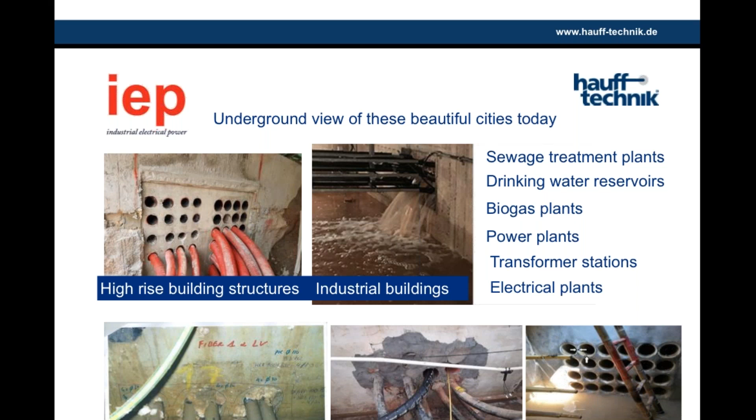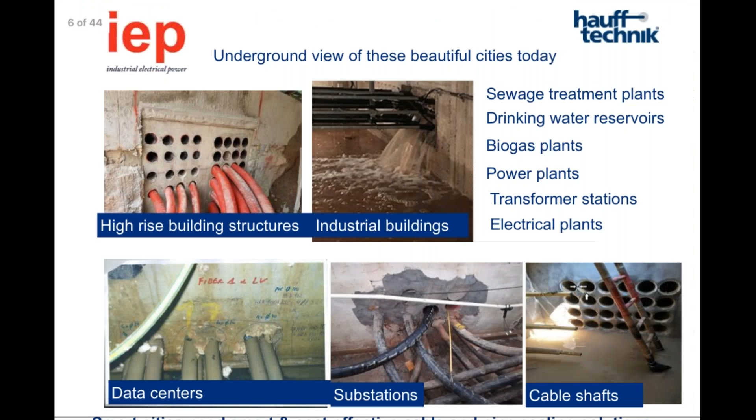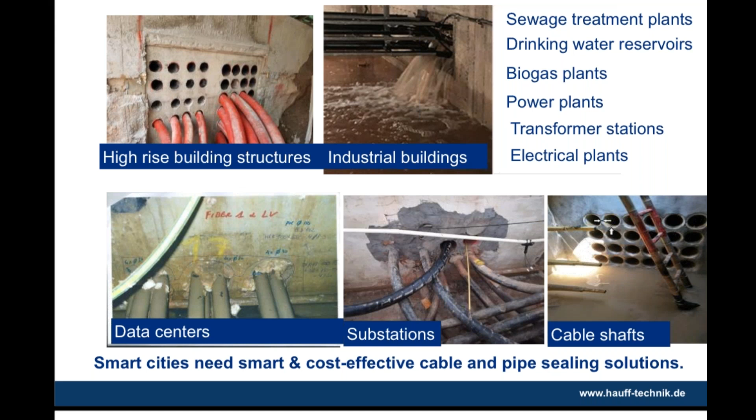A lot of architects, even today, make it a bit easy by planning or integrating a PVC pipe into a wall, or leaving a rectangular opening in a wall, or asking a wall to be core-holed so that later an installer can bring his pipes or cables through the wall and try to seal it off in the best way he can. Unfortunately, you will all experience that in the past, this kind of sealing method always results in a lot of water ingress and a high cost of maintenance. Having a proper and effective sealing system in place in any residential, commercial, industrial, or treatment plant and facility plays an important role in today's development.

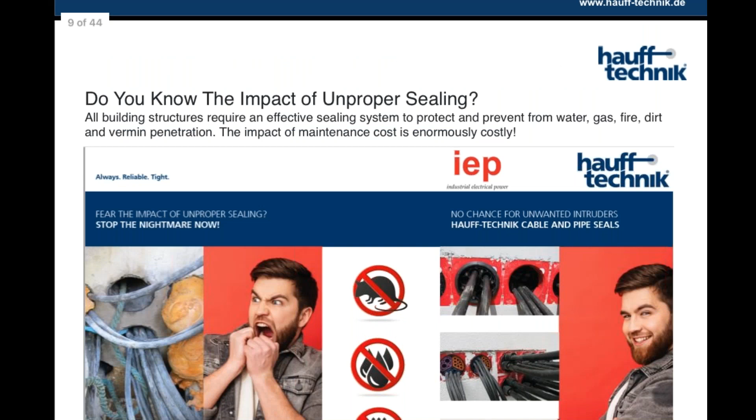Do you know the impact of improper sealing? Meaning, if you put in a simple PVC pipe, which might seem a very low-cost starting point, at the end it becomes a very expensive one. All building structures require an effective sealing system to protect and prevent water, gas, fire, dirt, and vermin penetration. And the impact on maintenance cost is enormous.

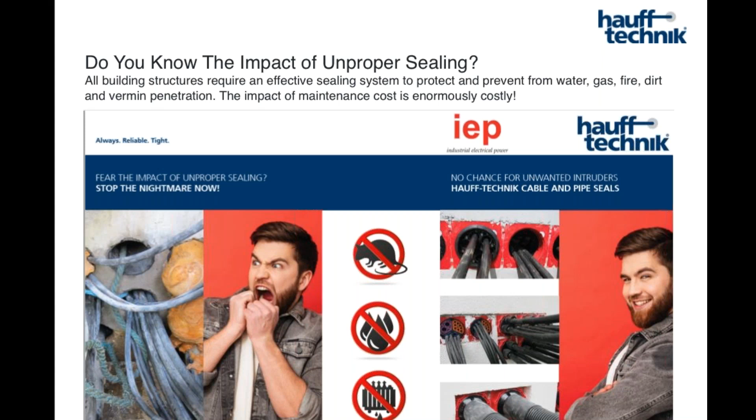Through my job, I had the ability to talk with a lot of maintenance managers or CEOs of utility companies, and I always asked them: what is the budget that you spend on maintenance to get water and vermin out of your buildings? They all look down and start to cry very hard, because these maintenance costs run into the billions and billions of ringgit every year.

If you would focus on digital innovation to drive change and prepare for new opportunities in the post-pandemic building and construction world, you might end up with Hauff Technik as your partner for entry systems and sealing systems. By the way, did you know that Hauff Technik in Germany has been amongst the top innovators for more than 10 years among small and medium-sized companies? We are in the top 100 during 10 years in a row, and we are also, of course, a top employer for our employees.

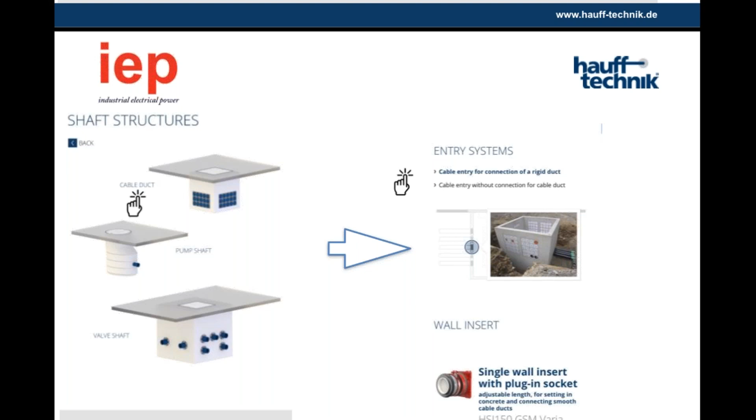Let's say you want to start up as an engineer or designer to build a shaft structure where your cable ducts or cables run in and you want to seal them permanently. In this case, you go to shaft structure, click on cable duct, and you end up with a nice picture, which I'll enlarge for you.

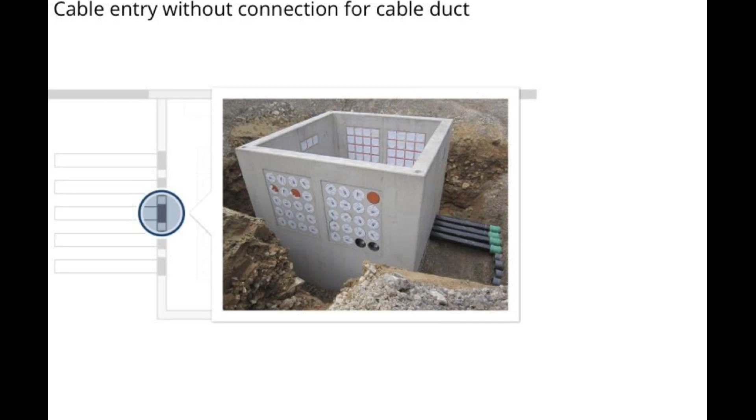In this picture, you can see our solutions and the connection of the cable ducts already. If you scroll down on the website, you will find our product for this solution, which is a single wall insert with a plug-in socket, in this case for a pipe OD of 160 millimeters. Not only will you get information on the product, but also installation instructions, test reports, data sheets, and tender specifications — meaning even the specification for your tender is already prescribed on our website.

Most of what we call PPVC, prefabricated pre-finished volumetric construction, used in Malaysia and Singapore, is manufactured in Johor Bahru. Johor Bahru is a Malay state near the border of Singapore, where a lot of precasters are situated.

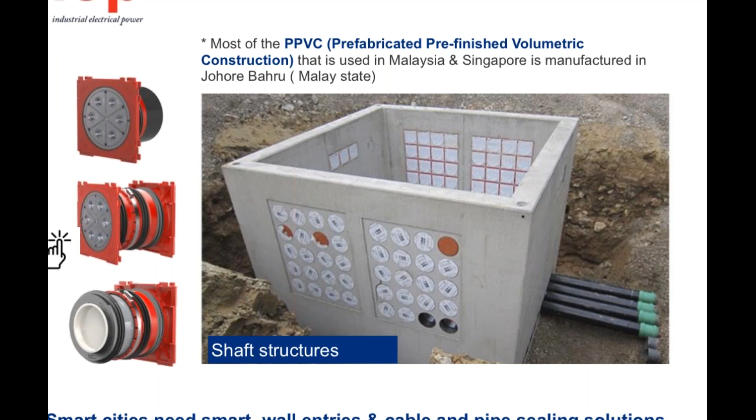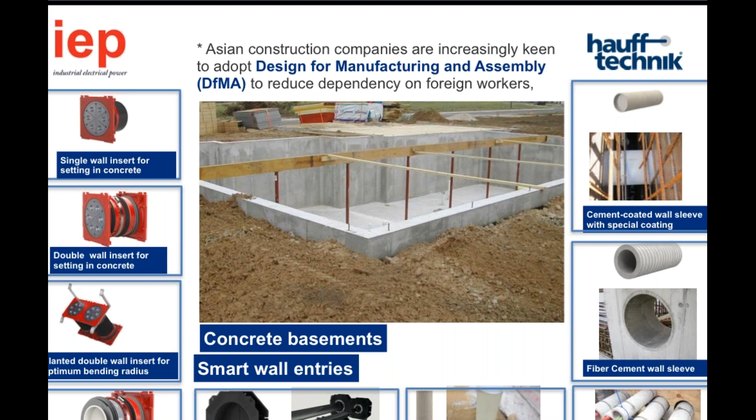Asian construction companies are increasingly keen to adopt what they call DFMA, design for manufacturing and assembly, to reduce dependency on foreign workers, reduce fault risks, and reduce high costs. If you are building a basement in concrete, whether prefabricated or built on-site, for these applications we have a number of entry systems ready for you.

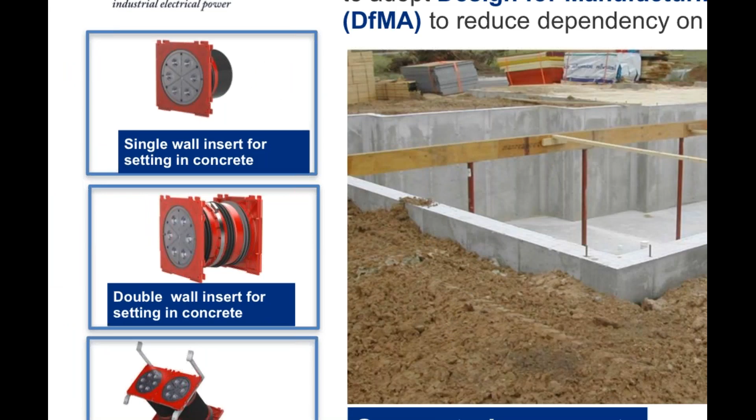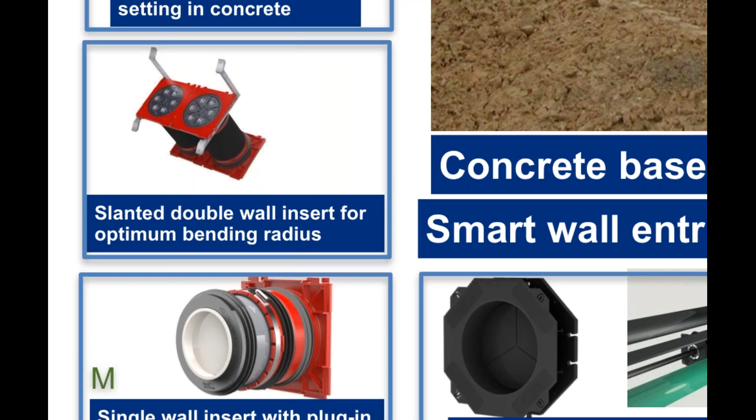If you need an entry system for small walls from 70 up to 120, or from 100 up to even 1 meter, or you need a solution where you put in an entry system under a certain angle for an optimum bending radius, or as we saw earlier, you want to connect a cable duct to your entry system, or you have an entry system needed for a pipe up to 200 millimeters, which is processed for PMBC, meaning polymer modified bituminous coatings.

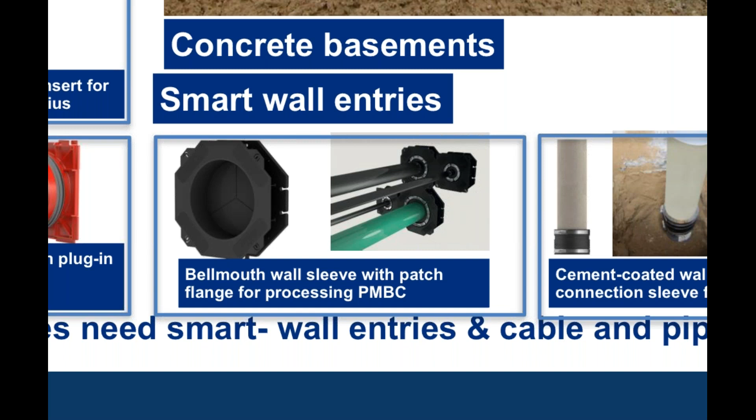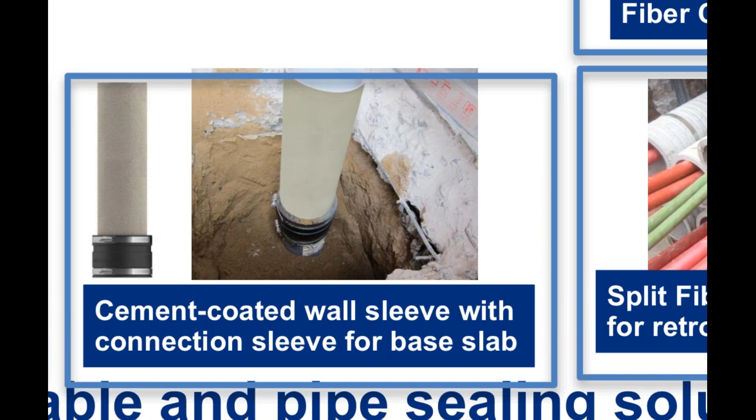We also have what we call a cement-coated wall sleeve. This is a PVC pipe with a specific coating on the outside. This bond connects with the mortar, with the concrete, up to 5 bar.

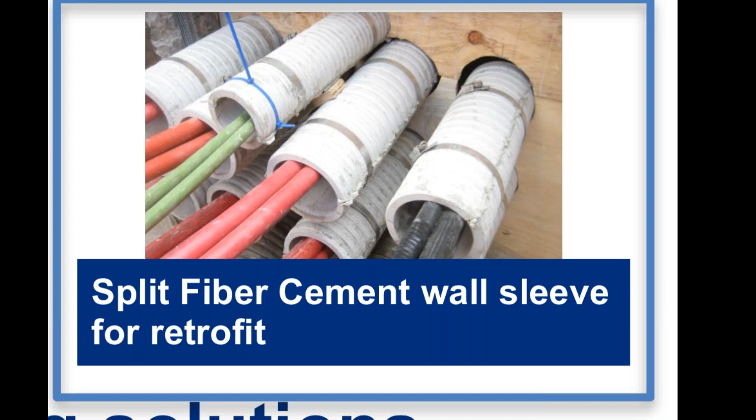And for retrofitting jobs, we still have our split fiber cement wall sleeve, which you can bring around existing cables or pipes that already run through a building, put them into a formwork, cast them in, and then afterwards seal them off properly.

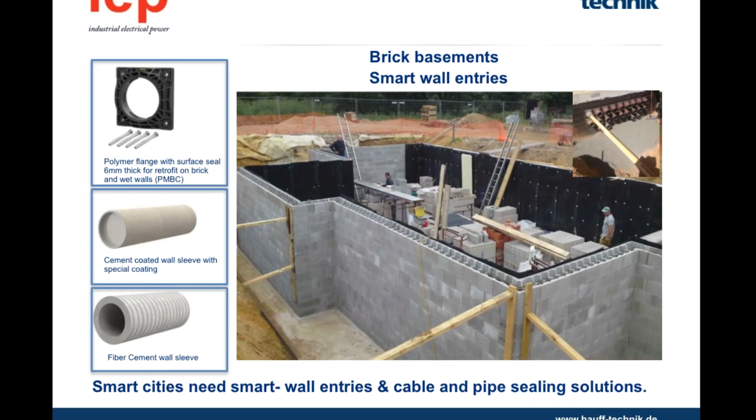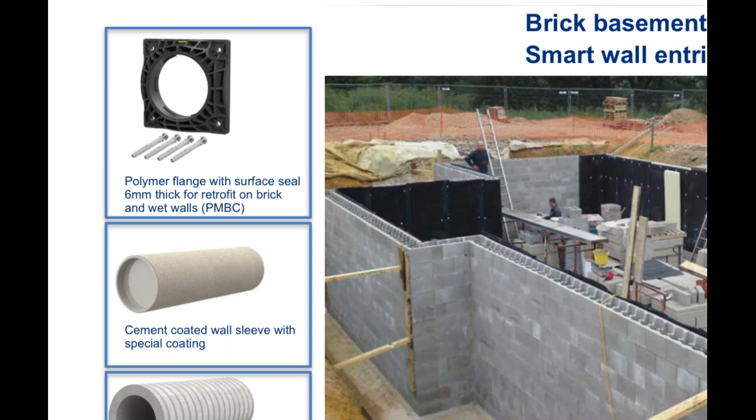Even for brick basements, Hauff Technik brings a number of solutions. In this case, you can work with a polymer flange with a surface seal of 6 mm thick rubber, and of course this flange is processed for PMBC. Cement-coated wall sleeves and fiber cement sleeves can also be used for these brick basement wall entries.

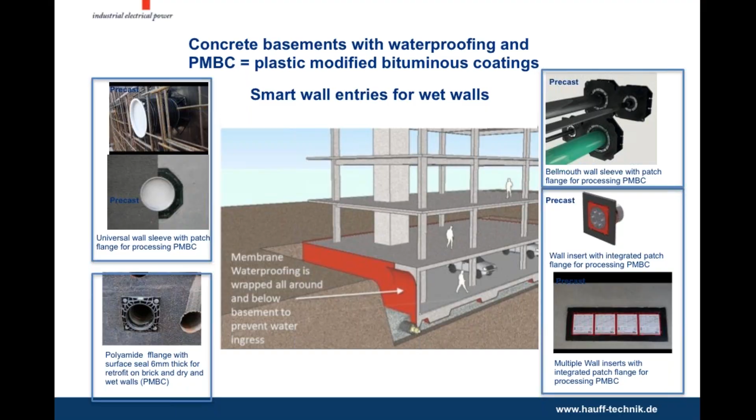Another variant is concrete basements with waterproofing and PMBC, meaning if you have a plastic modified bituminous coating on the outside of the building to prevent water ingress, you can, in the pre-design stage, already choose to use a universal wall sleeve with a patch flange that processes the PMBC. This can be put into your formwork and concreted in. Afterwards, you take off the cover, apply your PMBC, run a cable or pipe through it, and seal it off properly.

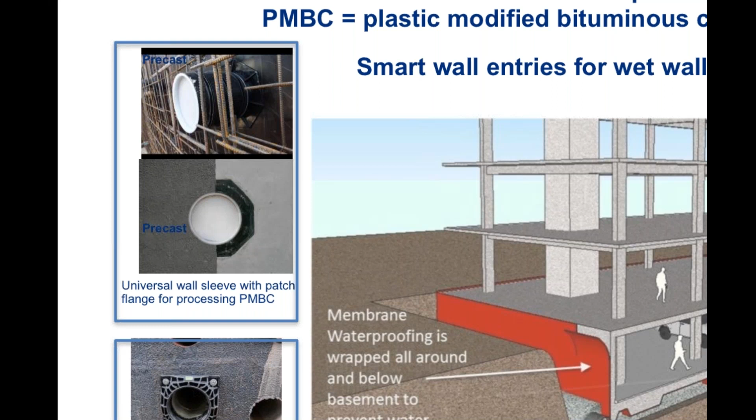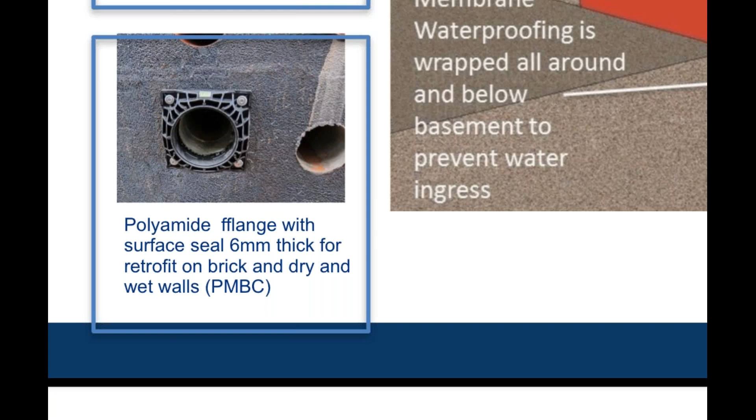In another case, even if your wall is already foreseen with a PMBC coating, you can use a polymer flange with a surface seal, which you can directly dowel to that coating without any loss of the integrity of your wall.

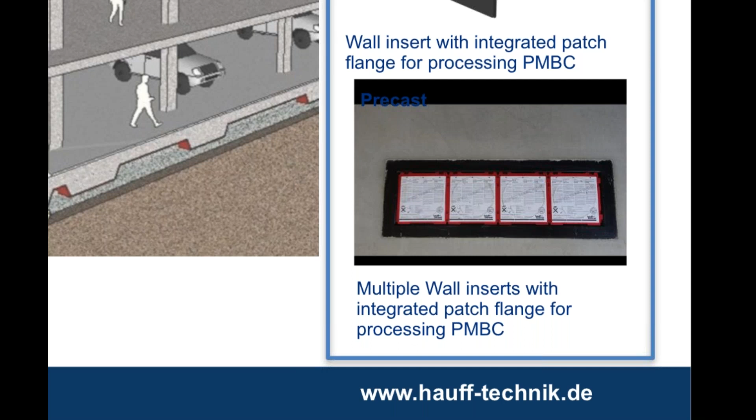And of course, our standard HSI, Hauff Snap-in entry system, also has patch flanges which can process PMBC. So in a number of cases, also for coatings, we have a number of solutions. Here you see a retrofit solution that we did in Australia.

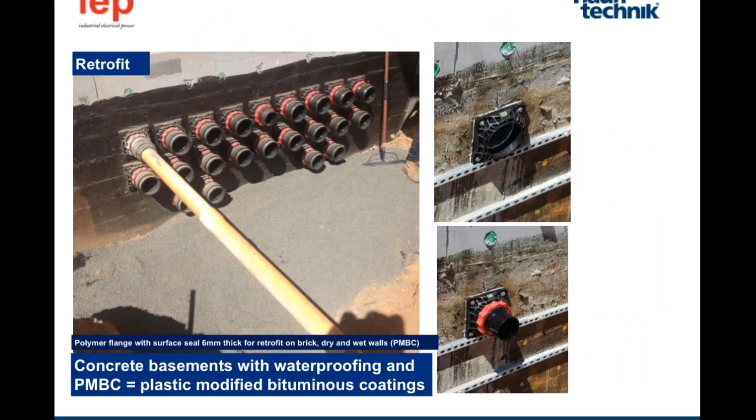Within 20 minutes, I have to go through a lot of information, and I want to share with you a bit of the new DIN standards. For those not acquainted with it, until June 2017, we had an old standard for construction sealing, which was the DIN 18195.

From June 2017, this changed into 5 new sub-standards, going from the 18531 up to the 535. The 531 handles the sealing of roofs. The 532 explains the sealing of parkings and traffic areas. The 534 covers sealing of interior spaces, and the 535 talks about sealing of containers, basins, and swimming pools. But a very specific new one is the 18533, sealing of underground earth contacting components.

So, sealing of underground earth contacting components. In all cases, we are in the soil, underground or in the concrete, and you have to run a cable or pipe through a wall. There is a specific new DIN standard which explains how to bring your seal properly around these cables and pipes.

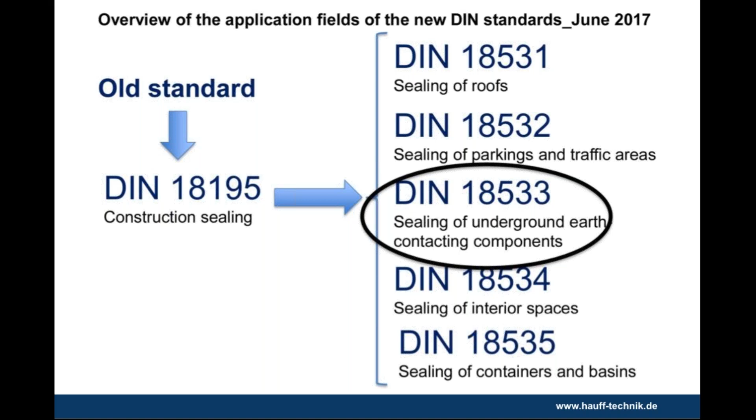Another thing that comes along, which might cause misunderstanding in a lot of engineering drawings that I see, is when a cable or pipe runs from outside underground and has earth contacting components, there is no fire resistance needed.

The simple truth about this is a fire can only exist if there are 3 elements available: a combustible product, an ignition source, and oxygen. In the soil, in the ground, there is no oxygen. If one of the 3 elements is not there, there cannot be a fire. Once the cable runs into the building through another wall or goes to a higher floor level, a fire resistant product is needed.

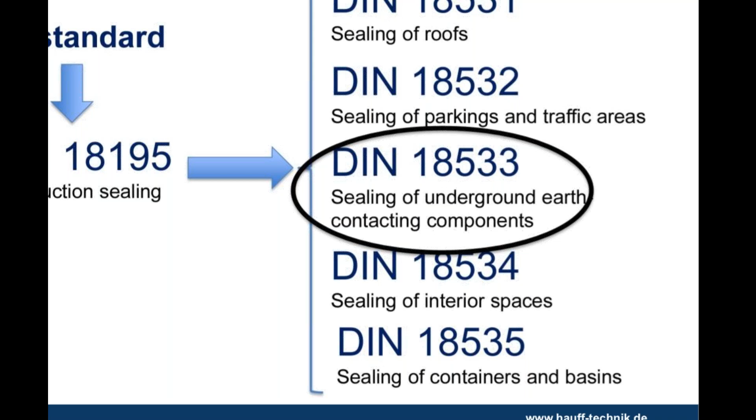So here you see another schematic design of the 5 new sub-DIN standards which we apply.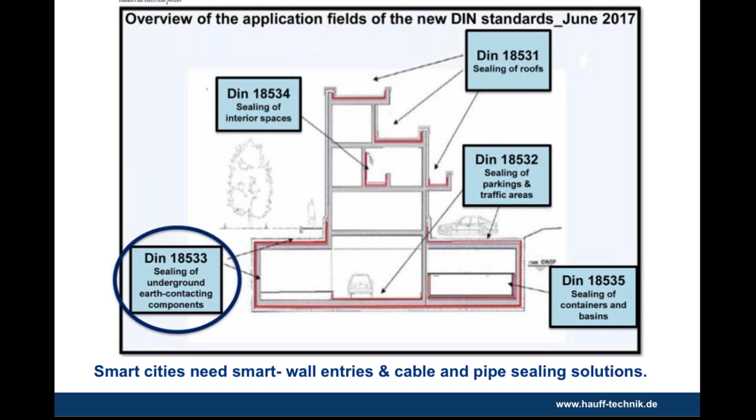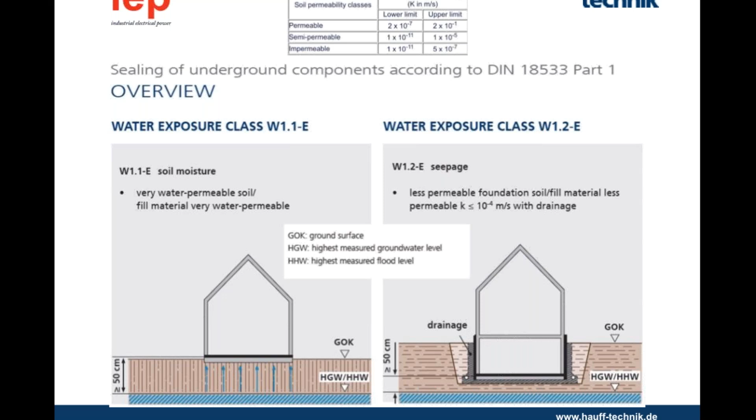When we go a bit deeper into the DIN 18533, we see the 533 part 1, which covers water exposure classes W1.1 and W1.2. There you can see we have basements, or houses where there is no basement and where the highest flood level is lower than 50 cm under the base plate of the house. In the 1.2, you can have what we call a utility basement of about 50 cm, where you bring in your sewage, power, telecom, and all your utilities.

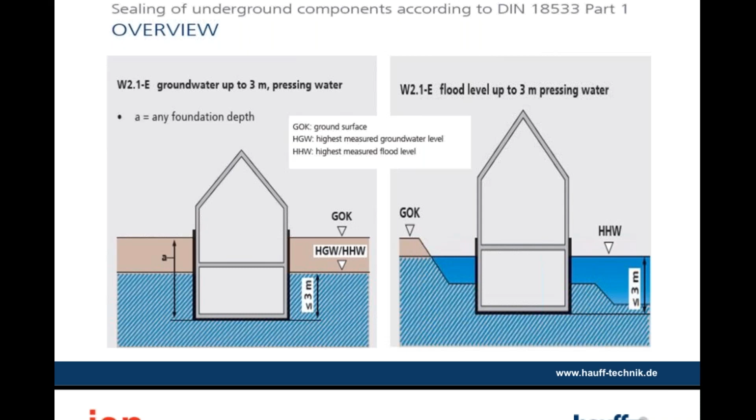These are already foreseen in what we call the PMBC, the coatings. There we have a specific standard as well for groundwater up to 3 meters, which is pressing water, or even flood level water up to 3 meters pressing water. And we have, within the 18533 part 1, the 2.2E, the groundwater flood level for more than 3 meters pressing water.

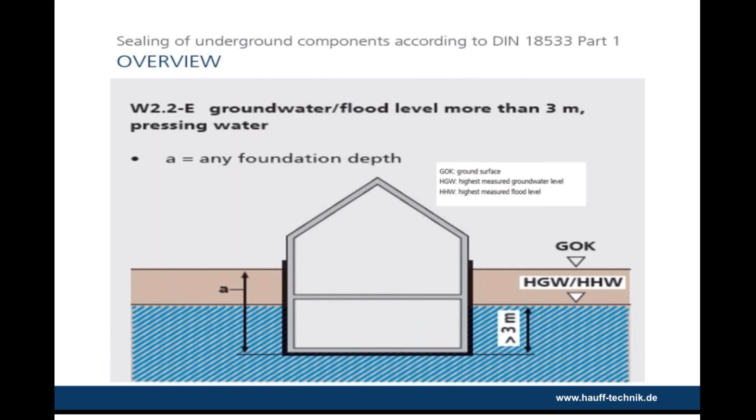Along with these standards, we also have the waterproof concrete stress classes 1 and 2. Stress class 1 is for pressing, non-pressing water and occasional standing seepage water, and stress class 2 is about non-standing seepage and soil moisture.

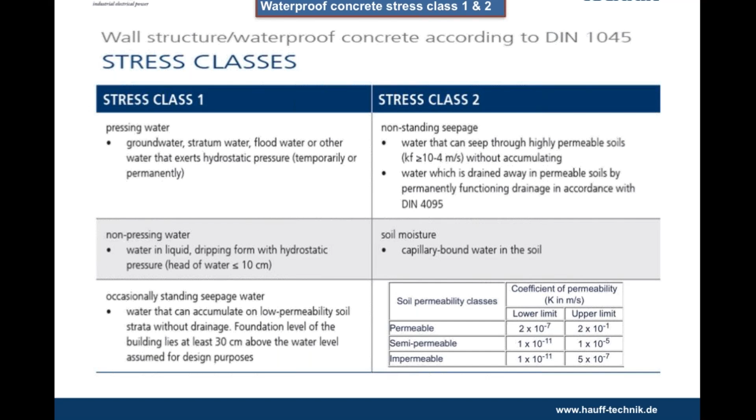Why do I show these standards to you? I hereby declare that all our entry systems, all our sealing systems used today are all applicable according to these standards. They're all tested according to the new DIN standard and to the waterproof concrete stress classes 1 and 2.

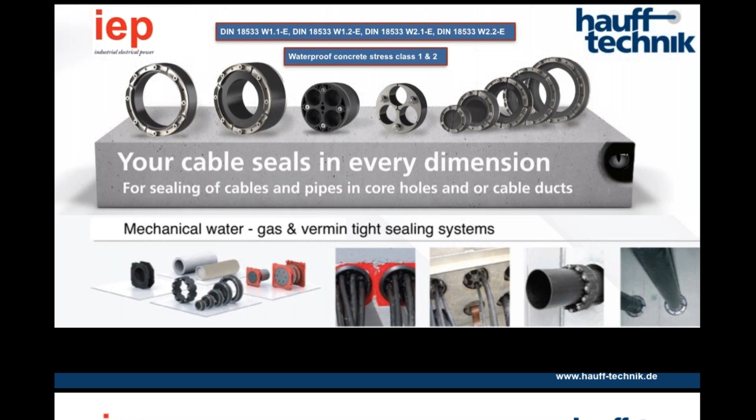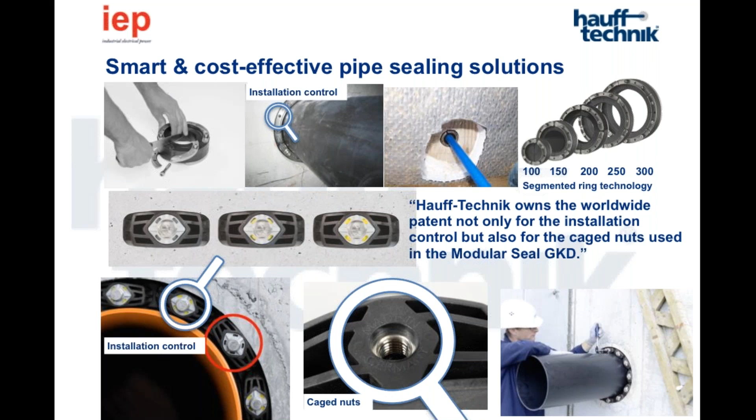In the beginning of our presentation, I said we're going to talk about smart and cost-effective sealing solutions. What is so smart about our solution? First of all, you have a seal here which seems to be a closed seal. Did you know that with a Hauff seal, you can even make it an open seal by just cutting it open, bringing it along a pipe, into a core hole, and closing it.

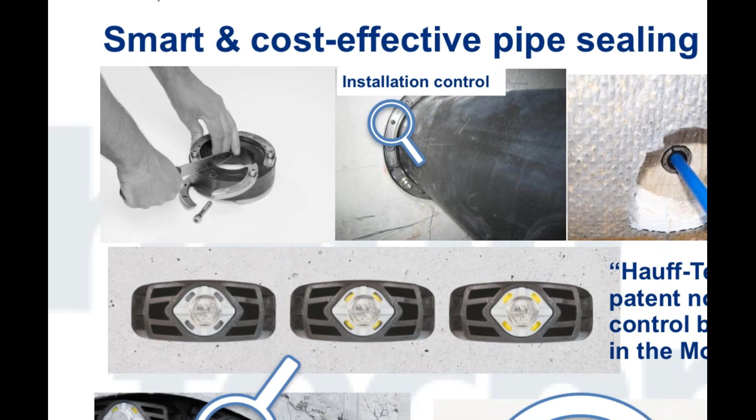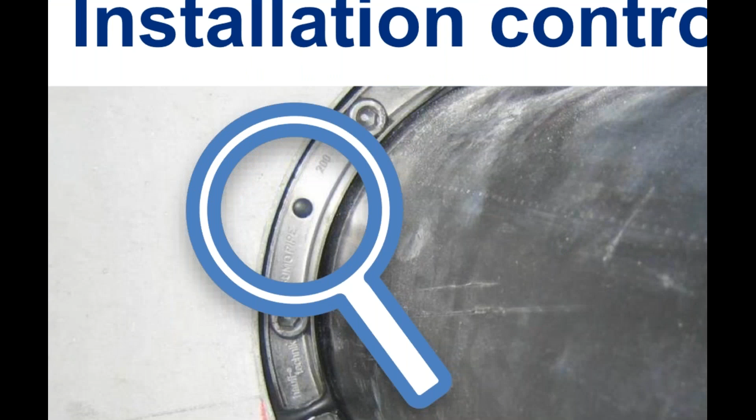We also have an installation control, which is in fact a hole into our pressure plate. Once you start to torque your complete seal, the pressure goes in every direction with the same force and comes out this opening here. Once you feel with your finger that the rubber is flush with the bottom of your pressure plate, you've reached your pressure, so no torque key control is needed.

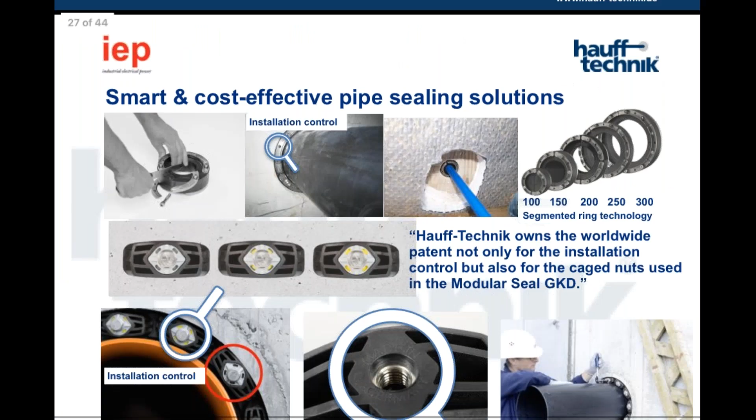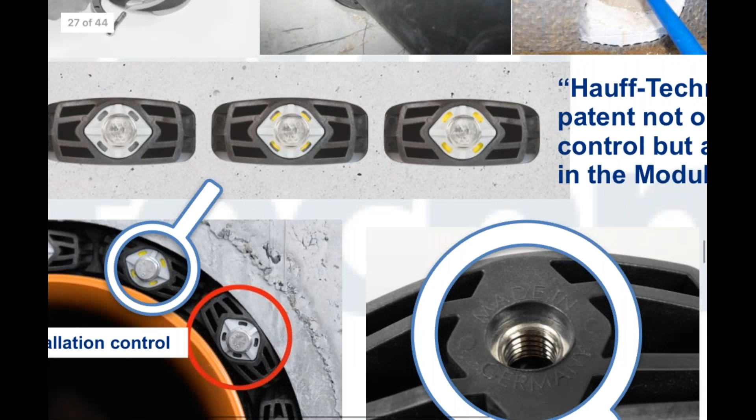Another smart solution we integrated next to the torque key is the segmented ring technology. Pipes from 18 millimeters up to 250 millimeters can easily be sealed with our segmented rings and integrated torque key. For bigger pipes, 300, 500, 600, even 1 meter pipes, we have our modular seals, which also include our smart integrated torque key control.

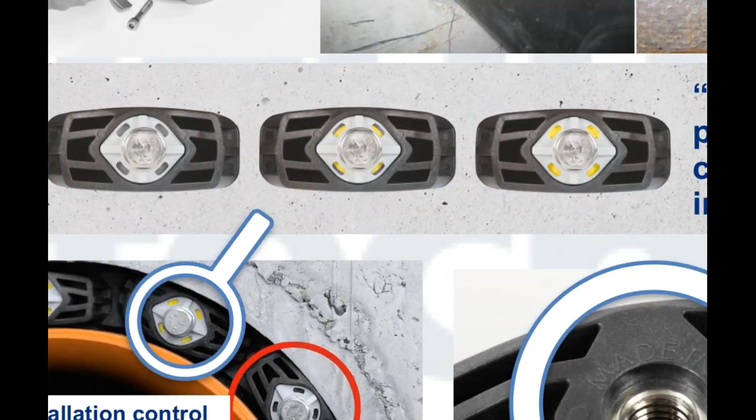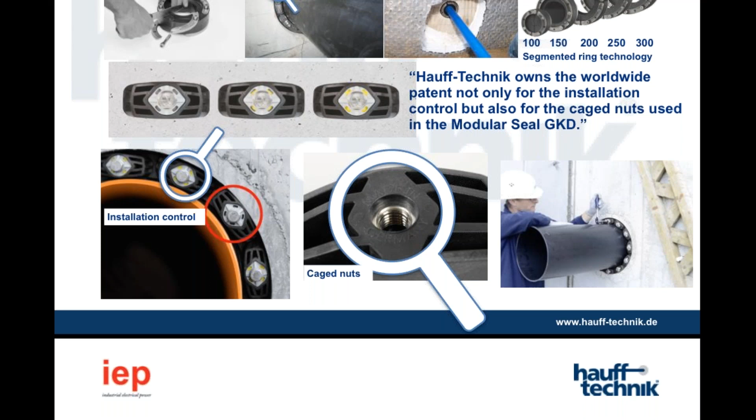Here we have pressure plates with windows. Once you torque up your pressure plates, the windows change color, going from grayish to completely yellow. Optically, you have a direct view on the construction site that your seal has been permanently sealed. Along with that, we have caged nuts integrated into the pressure seal, so no loose parts can drop during installation, saving time and money on the construction site.

Even for cable sealings, we have a number of smart solutions, such as our segmented rings in a flip-flop, right-left integration, with indication of the diameter ranges per segment for the contractor, making it easy to cut off segments according to the diameter of the cables.

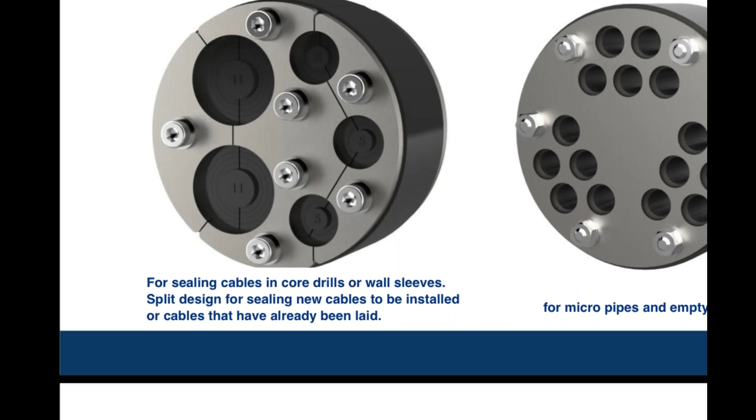Next to our standard seals, we also have a number of what we call SG types. These SG types range from 80 millimeter up to 200 millimeter with a variation of different diameters and segments, which covers normally 85% of your needs. The other 15% we can make individual customized seals for.

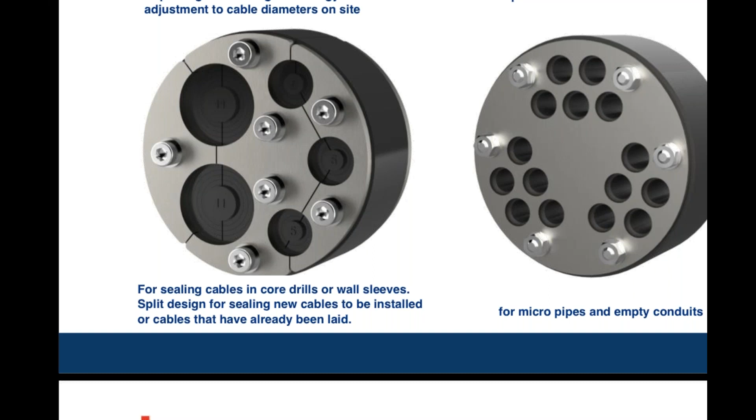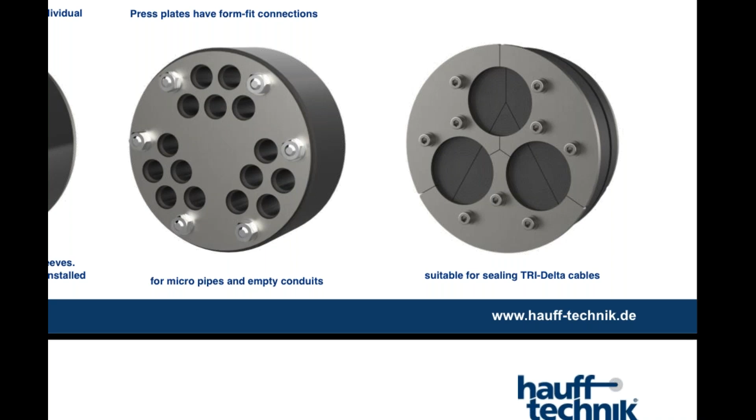Also for micro pipes and empty conduits, we have special designed seals for you. And for tri-delta cables, which have more or less a triangle shaped form instead of a round shape, we build up a very specific seal to seal these triangle cables.

One of the most important things post-COVID is we all need data integration, we all need a 3D model. Well, Hauff Technik is BIM ready. If you go to our website and focus on our BIM tool, you can open it and find 4 different product groups: cable seals, earthings, pipe seals, and wall sleeves.

Through the Cadenas platform, our customers, business partners, architects and planners can download all products from our BIM catalog in their preferable software and integrate them into their designs.

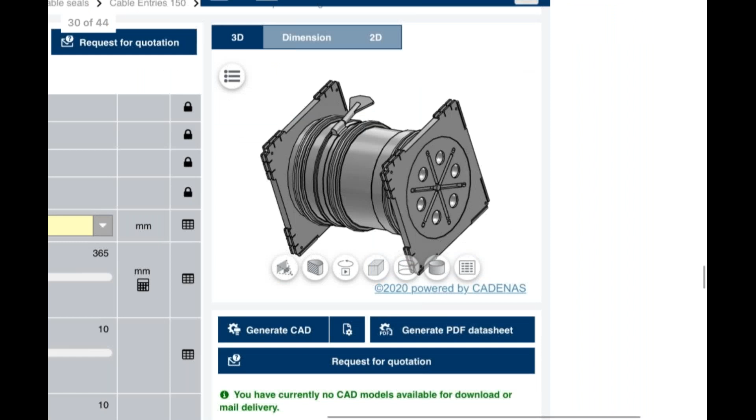Whether you embrace digitization to keep your construction business running in the new normal, or integrate our HSI Hauff Snap-in entry system, you can see - let me enlarge it a bit - that you can edit a CAD format. With that CAD format, a list of CAD formats opens. You choose your required format and download your file into your drawing.

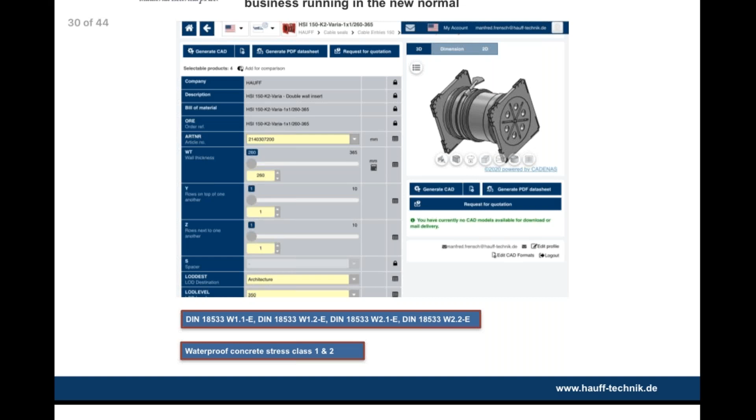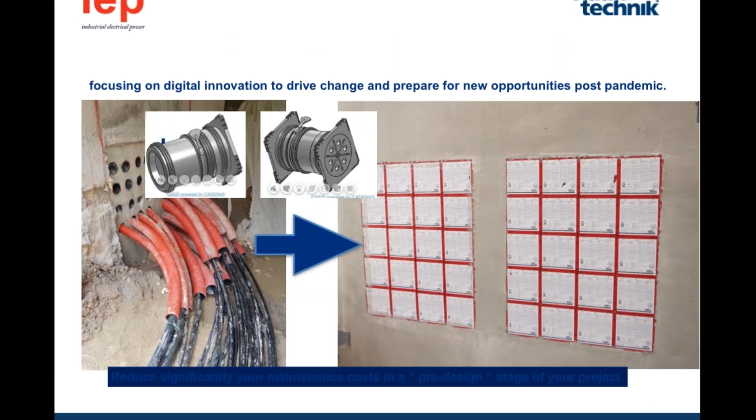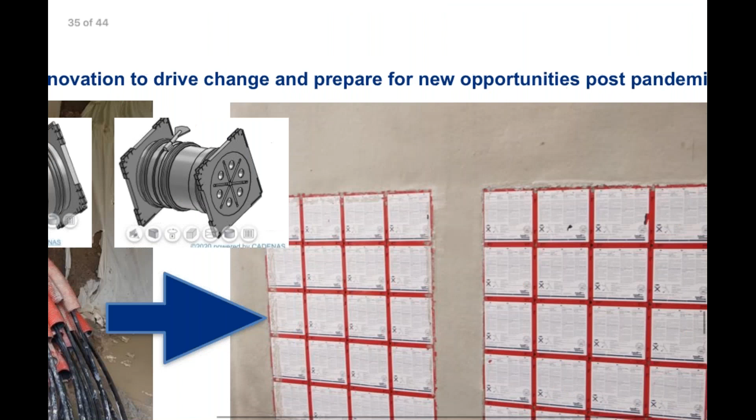This is not only for our entry system, but also for our flanges, pipe seals, and cable seals. So instead of putting a PVC pipe in a wall the standard way, you can now choose to focus on digital innovation to drive change and prepare for new opportunities in the post-pandemic construction and building world, meaning you can integrate a professional entry system for the lifetime cycle of a building.

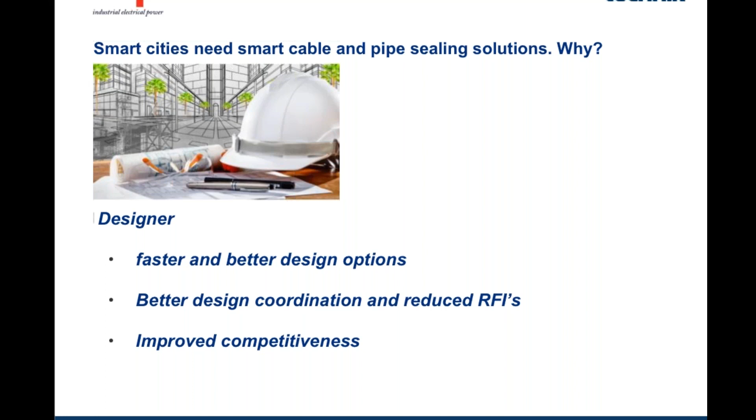Smart cities need smart cable and pipe sealing solutions. Why? From a designer's point of view, it's faster and better design coordination with reduced requests for information, and improved competitiveness. For the contractor, it reduces risks and rework, with higher accuracy in bidding and more safety. For stakeholders, it's the best design outcome for the project, improved cost, time and quality goals, more accurate and reliable digital asset information, and enhanced value assets.

So more innovation, better communication, higher accuracy, safer operations, improved productivity, on time, on budget, and on spec.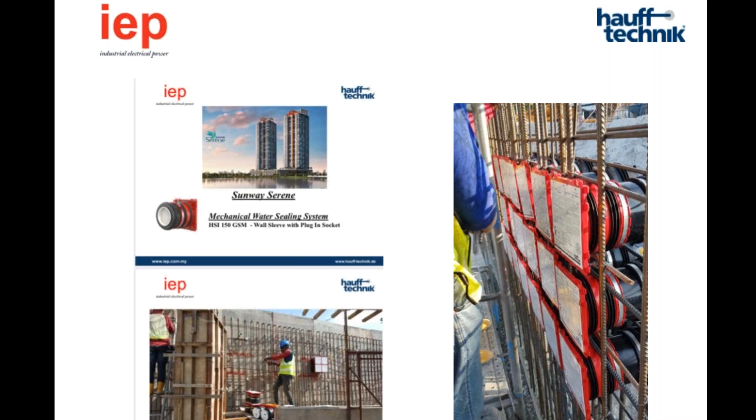Together with our partner IEP, we already realized a number of projects in Malaysia. One of them, the Sunway Serene buildings, where we designed a mechanical water sealing which connects a 160 PVC pipe directly into our entry system.

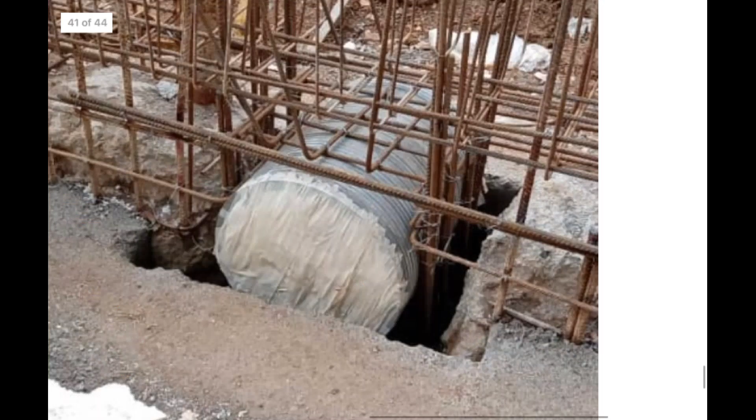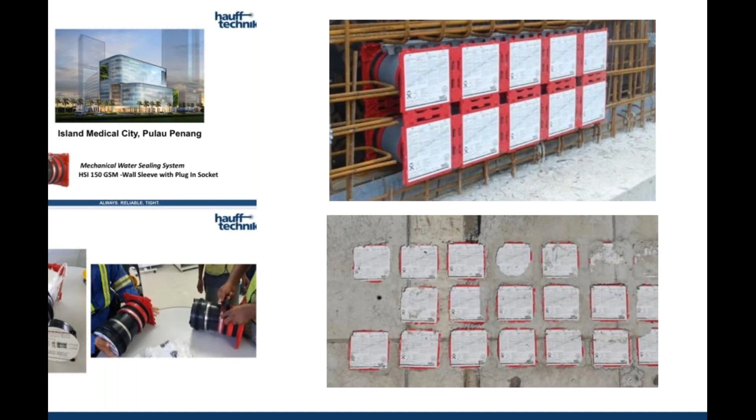A number of these projects have been qualified and tested by Tenaga, TNB, and in the future we are sure we will do a lot more projects with IEP and with TNB.

For more detailed information about our smart, cost-effective sealing solutions, please visit our booth in the Central Hall. For all cable, pipe, building entry needs, always reliable, always tight, think always Hauff. Thank you.